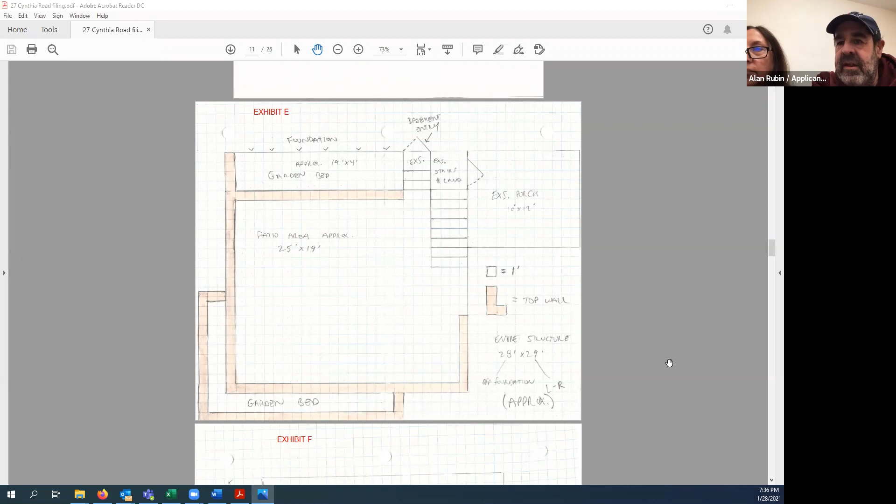So originally this project came before us. We were considering it for an administrative approval. In this case, the property is located near an extensive wetland, kind of back where Rosemary Brook outlets beyond West Street. They're approximately 75 feet from the edge of the wetland, and so we were considering an administrative approval as a minor activity. Under the bylaw, it's 75 feet for that kind of conversion of lawn to patio.

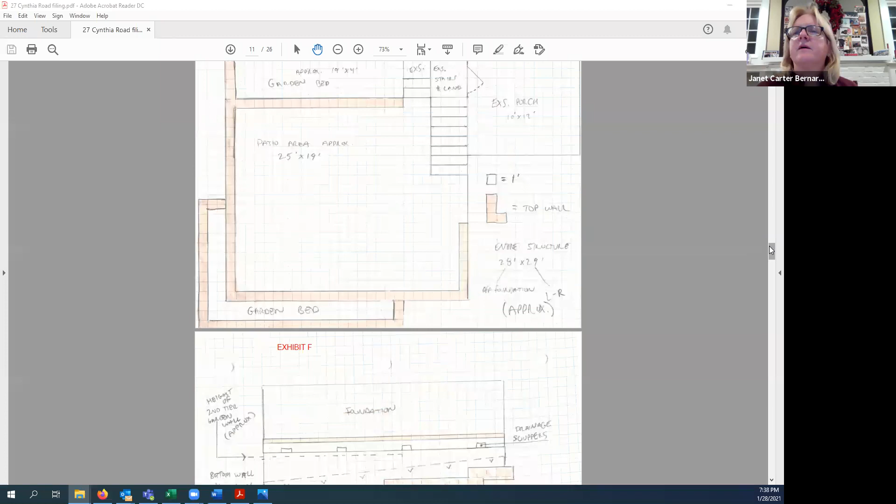So what kind of permeable pavers are you going to use? Have you thought about that, what they're going to look like? Well, yeah, we have a paver in mind. They're 260 smooth made by Techo-Bloc. And what's underneath them? Processed gravel.

Oh wait, slow down with the detail. So bottom wall, below grade, clay - Exhibit F, I think, spells that out.

So that 3/4 inch permeable processed gravel, how thick is that? It's normally about a foot, maybe 10 inches to a foot. Usually we'll dig enough to remove the organic matter, and as soon as we find buildable material, we can stop. So my goal is to actually disturb the ground as little as possible, keeping the structural integrity intact. I don't want to dig too much and bring in more than I have to when I know that the ground itself is strong enough.

And what happens to the topsoil that you're taking away? The topsoil, all the organic matter, will be stripped and removed as soon as I disturb the ground, so I won't be stockpiling any material. In some instances we recycle it, but in this case we want to get rid of it just to avoid any more erosion than necessary.

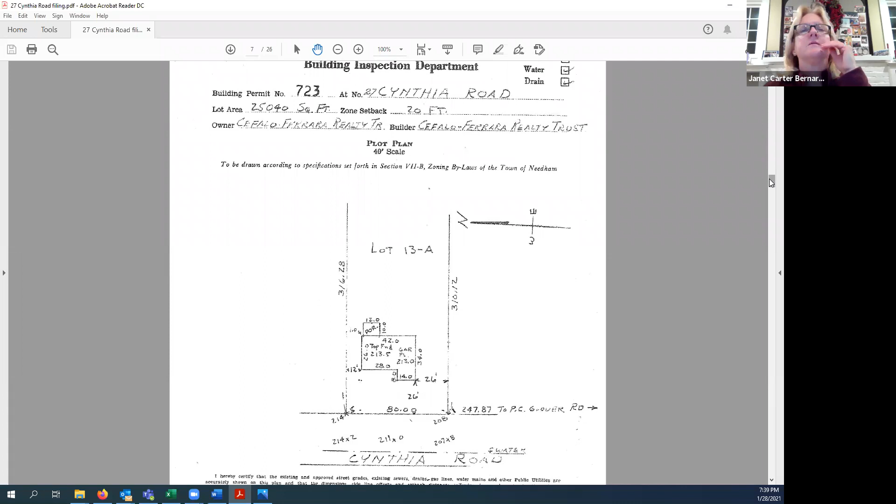Clay, can you just pan through these exhibits slowly? Okay, this is the property, and the wetlands is in the way back there. Thanks. Yeah, we have some GIS pictures that will show up as we go through these.

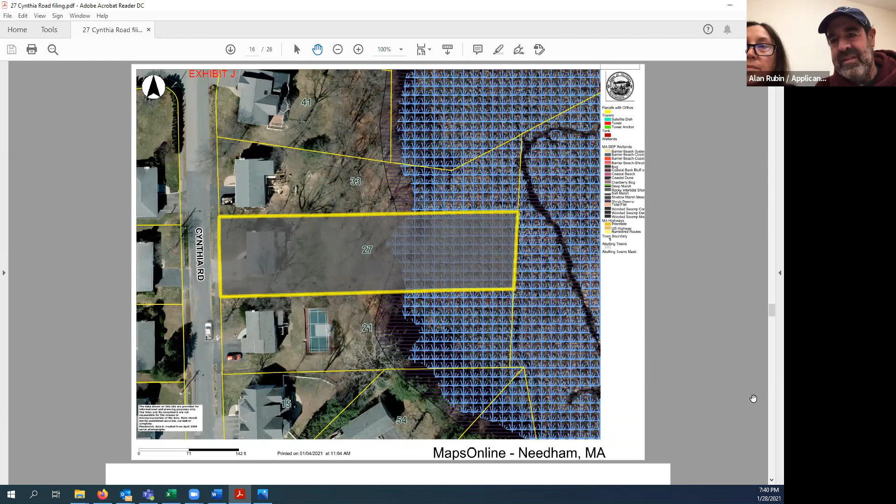Yeah, I remember looking at that, that's why I kind of kept expecting to see it. I'm like, wait, where's that picture that showed the wetlands? If I jump towards the later exhibits, there's actually the aerials in here. Oh yeah, yeah, yeah, this is the one. These are, I was looking at these. Is it a tennis court your neighbor has? Yes, a sport court.

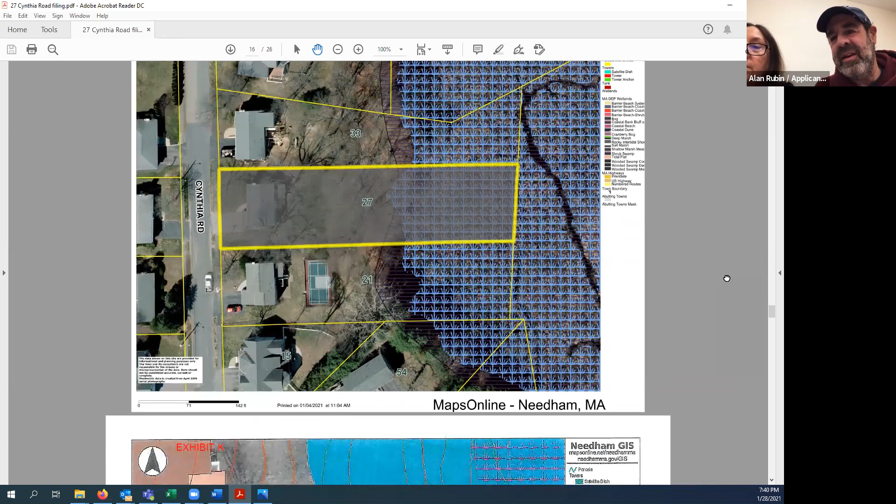This system is wonderful. The town engineer was very helpful in explaining how to utilize it. How to use - oh yeah? How to utilize the permeable pavement? Oh no, the GIS system. Oh, the aerial. GIS system. Yeah, yeah, yeah. It is pretty good.

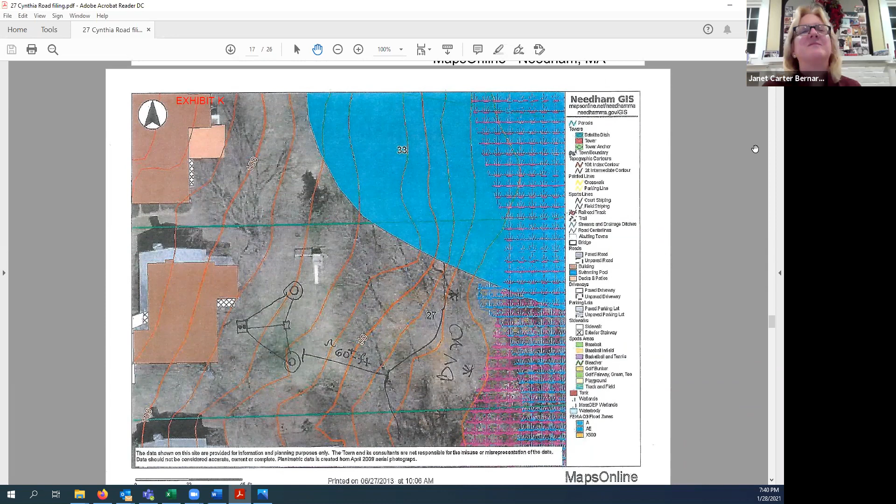That's good, all right. So you guys are done with your presentation? Anything else to add, unless you have any questions? Well, maybe the board does, so we'll see. If you want to take that, yeah, thanks.

Stephen, do you have any questions or comments? No questions. Sue, do you have any questions or comments? I don't. Allison? The only comment I'll make is that the base is not classically permeable stone. 3/4 inch gravel and stone dust, and polymeric sand for joints, is not considered. Oh, he was showing sand for the joints? It's missed that, it's not - well, it's got some plastic stuff in it, but typically a true permeable paving system has, has like the...

It sits on a number 57 stone and then another 12 inches of gravel, not 3/4 inch. I just wanted to put that out there. I think it will function, though it's not your standard permeable system. Behind the walls, the backfill will all be 3/4 inch stone. So everything's pitched a certain way and will drain properly into something more permeable than the 3/4 inch process, as a second line of defense.

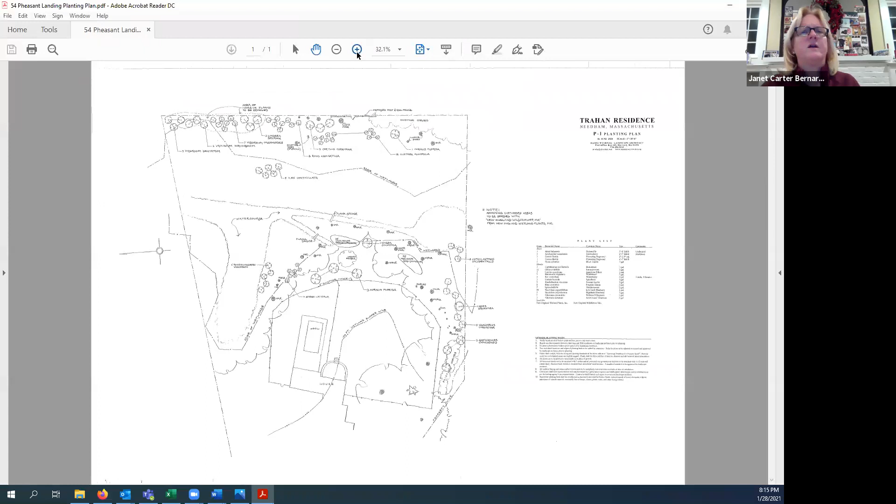Actually, I can pull up the planting plan right here. Yeah, Allison, do you have an opinion on if they can plant these by hand? Let's see, what's the biggest thing? It's gotta be 5 gallon, something you could get in a wheelbarrow. The 7-gallon is the biggest, it's a witch hazel. And the trees, I mean, yeah, I've planted plants this big by hand. I think they can.

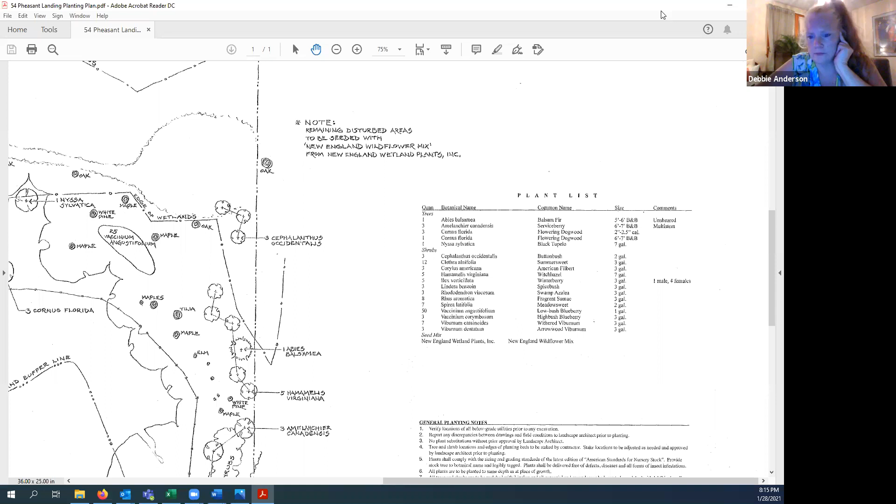So we can require them to plant them by hand? I think you need a couple of people in a big wheelbarrow - they don't need a backhoe to dig a hole. I don't think we need to have - we can say they don't need a backhoe to go into the wetland. So does it say in that order of conditions that there's no heavy equipment being used? Yeah, do it by hand. No mechanical.

I don't see it in here. One of our stock conditions that we often include is that no heavy equipment or machinery in the area. So I'll make sure that stock condition is in there as well, and again emphasize that they should be bringing it in on wheelbarrows and by hand.

So you highlighted a few other things. This number, 20 seems reasonable, 25 seems reasonable. I don't believe we explicitly had them include emblems on the plan, but at the time of enforcement for both projects, we discussed having them mark out that 25-foot, or at least the wetland boundary.

I arbitrarily put 6 because that's often what we use. This may be a larger area where you may want 10. I can bring the plan up, but 6 is fine. If you have them marked throughout, I think it sends the same message that it's a wetland area.

Are they putting them on the edge of the wetland or the 25 foot? Where are they putting these markers? Normally we have them put it on the 25-foot. I would leave it to your discretion, I guess. Is that what your thing says, the 25 foot? Yeah, it says 25 foot. Bring that plan back up.

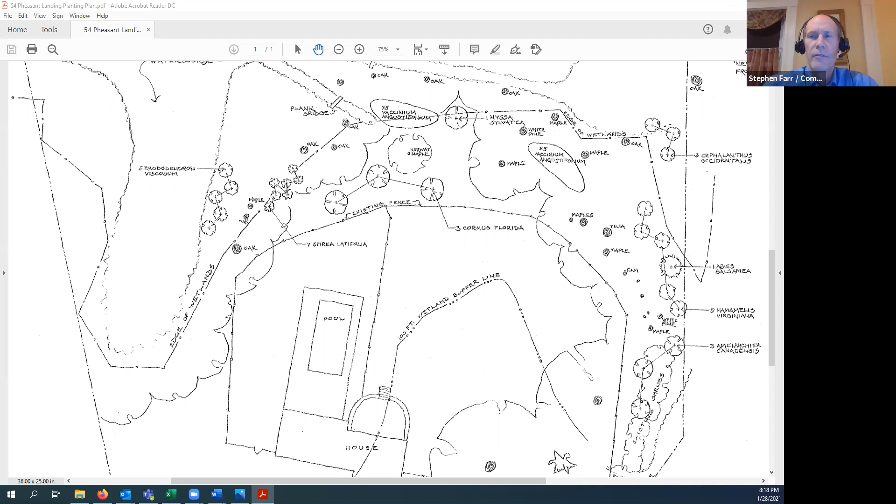Do we know what kind of markers they're gonna use? If they're gonna use something upright that's visible, or flush granite? No, they can't do that. They've gotta use something like the birdhouses we've used in the past, or boulders, birdhouses, fencing. Okay.

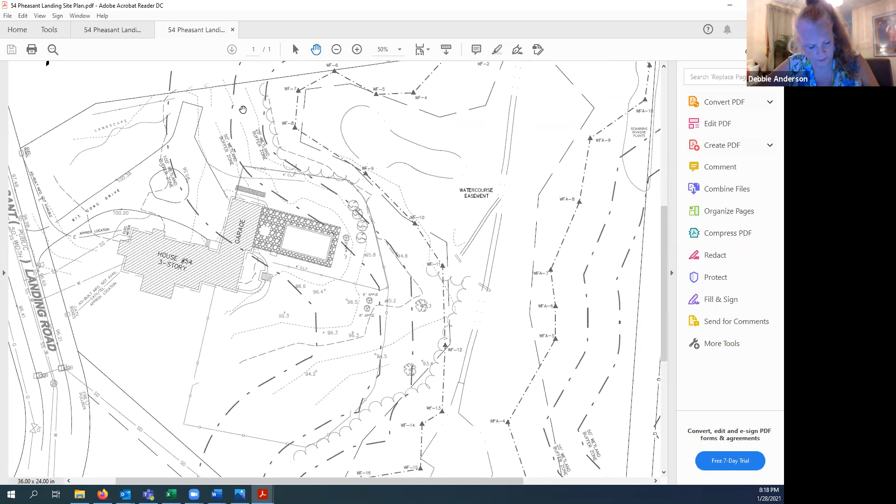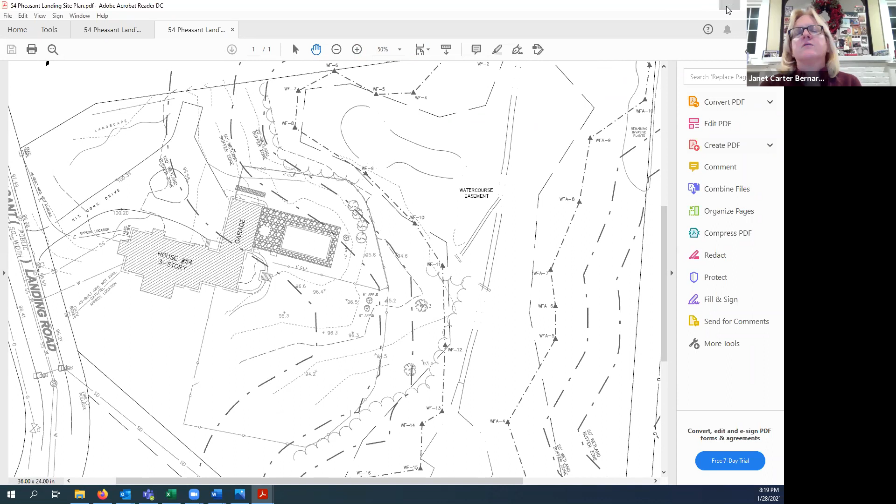Oh, this has the 25-foot line on it? Yeah, and if you'd like, I can rotate it to be in the same orientation as the other plan. So they'll be able to fit it in without putting it inside the fence, they can get it on the outside, either side. Okay, that's great. So that's fine. The 25, the markers are good, no construction equipment is good.

What else is highlighted here that's different? So the last thing we discussed at the previous meeting is that in order to apply for a certificate of compliance for this project, they'll need to submit a report from a certified wetland scientist, botanist, or other qualified professional stating that all the plantings have been completed strictly in accordance with the order of conditions. If there's been any deviations, they need to let us know, presumably before that. There are stock conditions saying they should talk to us before deviating, but it doesn't make sense to have an engineer review this, and we're also not requiring an as-built plan unless they've deviated, in which case we may require them to submit those deviations on a plan.

And there's a 2-year monitoring program? Yeah, I just used the stock language for that as well: a 2-year monitoring period with a 75% survival rate, 85% live wood.

Is there any concern that they're gonna have deer eating all the plants like that other house had? I don't know how you figure that out, but the other one that was so close, they ate all of the trees. Remember that one near the Charles River?

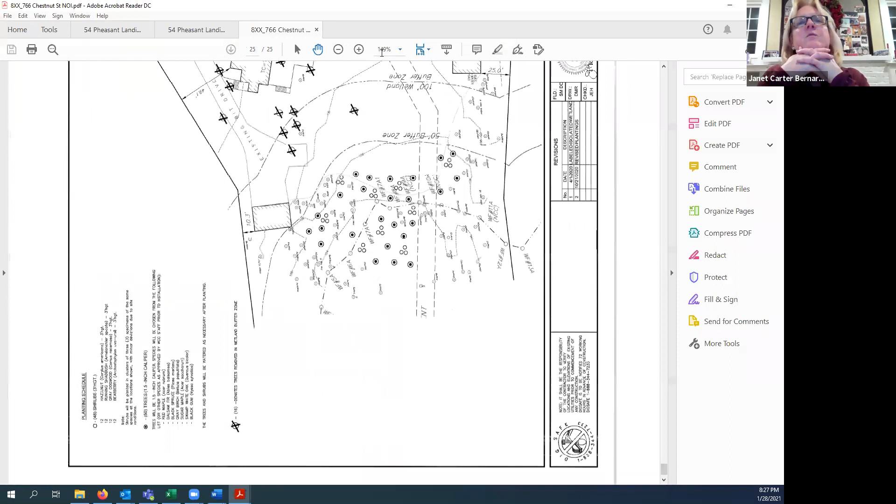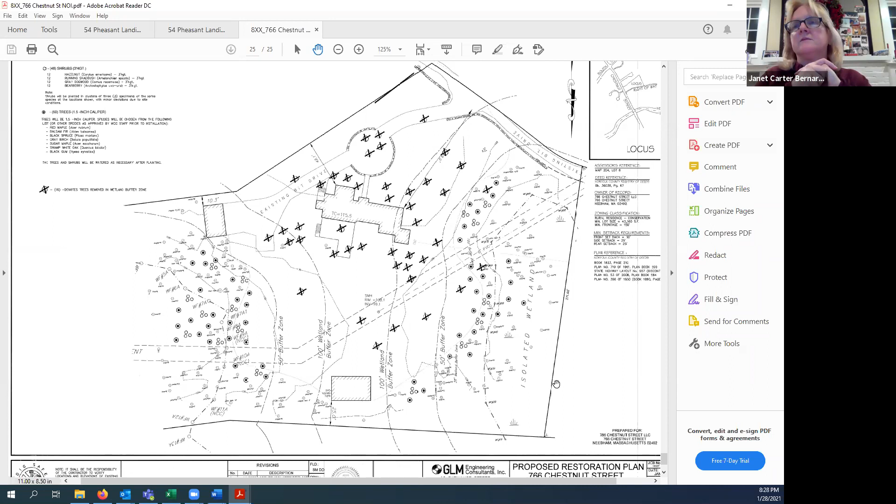Because the isolated wetlands also have a buffer, but is that not what we're using? You could almost argue 6 on each side, 6 markers per wetland area, or 12. But for the isolated wetland, do we require that? I don't know, do we?

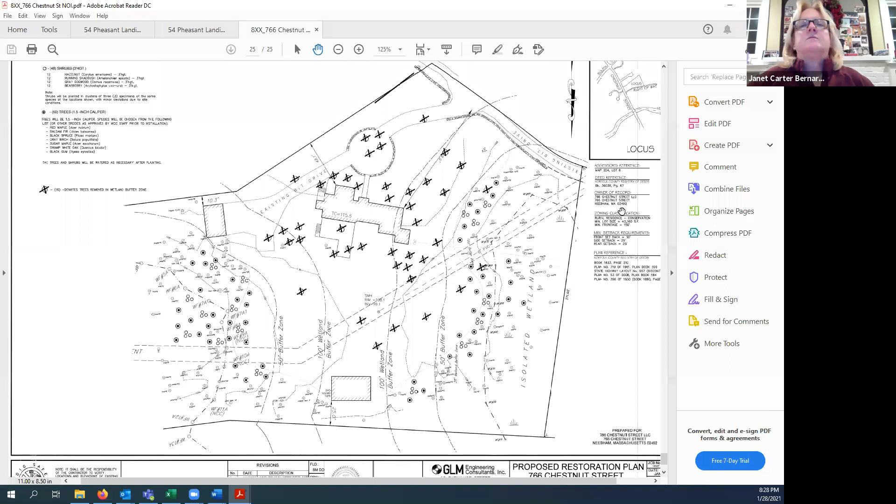Yeah, why not? We treat it just like a wetland under the bylaw. IWs, yeah, okay, so that's fine with me. Anybody care? 6 on either side? Sounds good to me.

I don't think they can do them here. They're planting bigger trees, so I think they're going to end up going in there with equipment, but it's over his beautiful lawn, so as long as they don't go in the wetlands. One of the other additions for this one is that they will need an as-built plan showing the final locations, due to how robust this is and because they are planting trees rather than individual shrubs and seeding. That was one of the things discussed during deliberations on this one.

Okay, that makes sense to me. Anybody else? You can pull that down now. Okay, anybody have any opinions, comments, concerns?

First we need a motion to waive the work within the 25-foot no-disturb zone. They are not in the wetlands on this one, though, they're just in the buffer. So moved. Thank you, Bill. Can I have a second? Second.